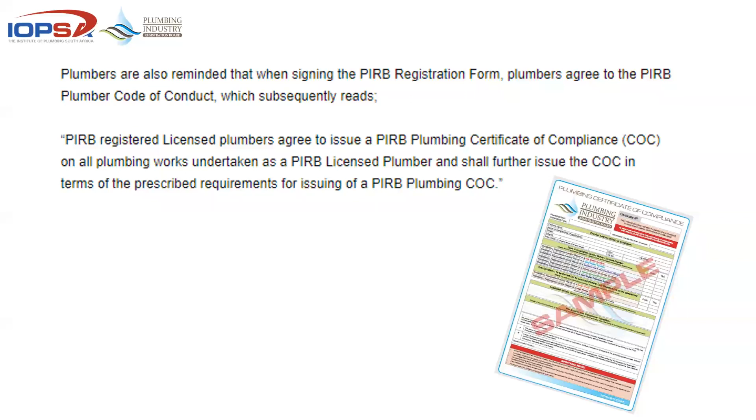Important to note, and this is where the discussion's heading, that COC is between the client, developer, builder, and the plumber. The local authority has their own rules, their own set of requirements that we'll look at now.

The issue at hand is that there's a caption down the bottom of that COC that gets signed by the plumber: the above plumbing works was carried out by me or under my supervision, and that it complies in all respects to plumbing regulations, laws, national compulsory standards, and local bylaws.

And herein lies the problem. The moment we step down from the national regulation, and it comes to the application of the building regulations and the actual inspections and work done within your municipal boundaries or in your metro boundaries, it becomes a local authority thing.

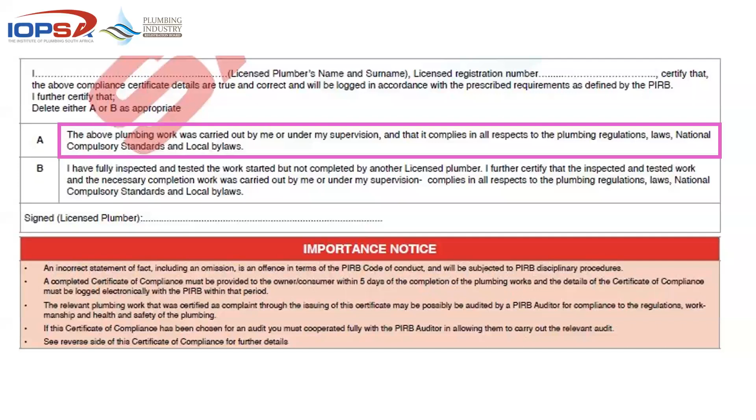So the argument around COC, no COC, license, no license, put that aside. Think about this like a responsible plumber would with regards to approaching his work. I'm just going to flick through a couple of screens so you guys can see. You might recognize your hometown or your metro.

Basically, all of these metros, as it stands here now, and we can keep going through them, they'll tell you that after the completion of a job, you need to have this thing: the test shall be in the presence of an authorized personnel, a certificate certifying the work.

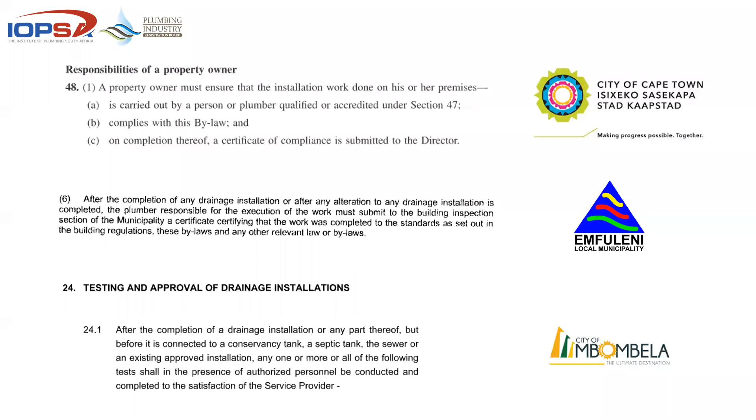So if you're on the drainage side, you could actually have them come and test it and set out as to the standards set out in the building regulation. So we can keep going at this. You can go from one local authority to another. Ekurhuleni goes a step further to say that you need to have it cleaned, you need to have all of those things there, and we'll get back to those two days shortly.

When any drainage installation is being or has been installed, or any alteration or extension of any existing installation is being or has been carried out, no person shall cover any part of that installation, alteration, or extension, or cause, permit, or suffer it to be covered until it has been inspected and approved by the council. Inspected means that the inspector's been there so he can cover it up. Inspected and approved means that he was happy with what was seen or with what was on site, and we have to, or we're allowed to then, cover it up.

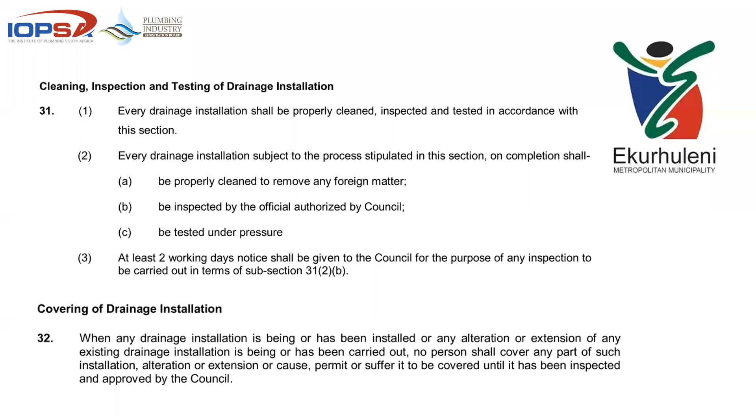You can go to Mossel Bay in the Southern Cape. You can go to Maritzburg, Msunduzi. You can go that way if you want to.

Sol Plaatje all the way up in Kimberley, Nelson Mandela Bay Metro, and then City of Tshwane.

I'd like for the guys in Pretoria and that area in Tshwane to look at your bylaws. It says where a drainage installation that's been constructed or drainage work carried out fails to comply in any respect with any of the provisions of the building regulations or these bylaws, in other words your Tshwane local bylaws, the owner must, notwithstanding the fact that he or she may have received approval for the plans for that installation, carry out upon receiving written notice the repairs, replacements, alterations, or maintenance work in respect of that installation. So even if the plan was approved by the local authority and there's minor issues on the plan, you'll find that they still expect you to go back and sort it out.

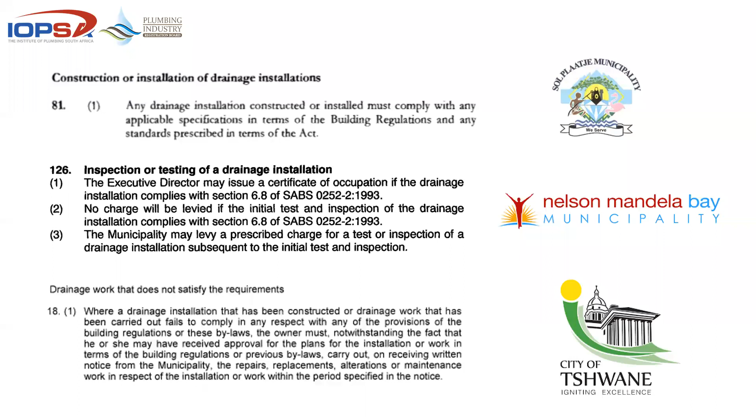Then I skipped one in Nelson Mandela Bay for a reason. You'll find that this one actually refers to section 6.8 of SANS 10252 of 1993. So whether it's the code of practice or the standard for drainage, or whether it's the building regulations that get referred to, let's have a look at 6.8. It says the drainage installation shall be inspected by the local authority - not another plumber, not PIRB, not IOPSA compliance auditor. It shall be inspected by the local authority as prescribed in regulation A22 of the building regulations. So you see that Ekurhuleni basically used this portion of the standard in their bylaw.

Drainage installation should be inspected by the owner or his representative as the installation work proceeds. On completion of the installation, before any work is concealed or covered, it should be ensured that - before we get to those four points, I'd like for you to have a look at this.

The standard says the installation should be inspected by the owner or his representative. And let's be realistic, guys, we're in business. There's no way an owner is going to pay you X amount of money to do a job and then take the responsibility of doing an inspection on the work you're doing if he's already paying you for it. So when it comes to 'or by his representative', if you are the appointed or selected contractor, albeit by contract, by tender, or by selection, then that means you are his representative.

All pipes and fixtures comply with the provisions of the standard and are free from defects. All pipes and fittings are clear of debris and superfluous matter. No jointing material projects into the pipe, and all joints maintain the continuity of the bore. And the pipework is placed, positioned, and secured. So normally I start with a big hammer, but in this case we looked at the standard. There you can see the references if you need to take them down.

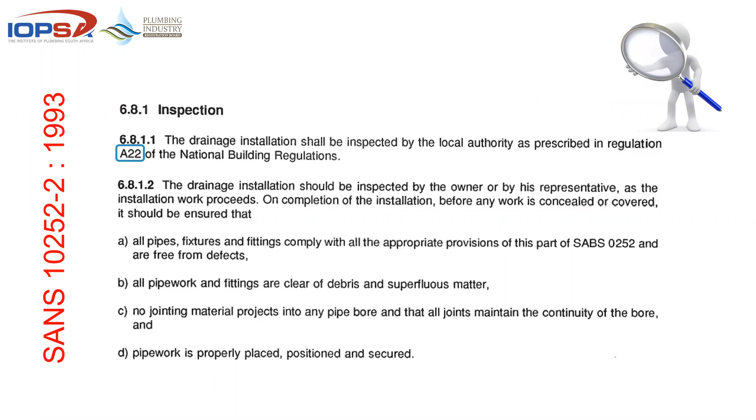A22 of the building regulations then continues to say the following: notice in the form required by the local authority shall be given by the owner to the local authority of a date which shall be at least 2 working days from the date of receipt by it of such notice, as the case may be. And we jump straight through to C because the foundation and the fire is not our problem at this stage. Any drainage installation will be ready for inspection and testing. So 2 days notice, give the guys from the council a heads up to say this is where it's happening, this is where we're busy, we've got a drainage installation for inspection and testing.

Then we skip to the next section that says no owner shall construct a foundation until the trenches, or enclose a drainage installation, until such installation has been inspected, tested, and approved by the local authority, provided this requirement shall not apply if that inspection has not been carried out at the end of the working day in sub-regulation 2. So you've given the guys 2 days notice, and he hasn't pitched up. It's a very thin line to be treading. The argument about opening back up or working this way or that way will always come back and be a discussion point, because on a different day you might phone the municipal inspector and expect him to pitch up, or beg him to pitch up on the same day because you need to fix it up. So this thing does cut both ways.

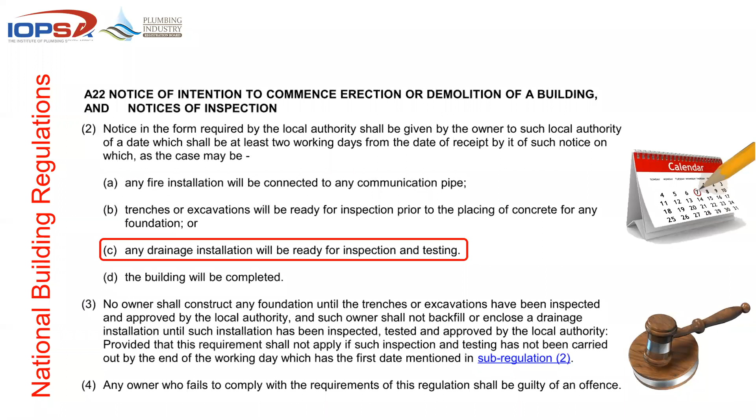The National Building Regulation continues to say in P7 that all these pipes need to be tested as per 426 and 427, as the case may be. It then says that no person shall put into use any drainage installation before such an installation has been inspected, tested, and passed by the local authority. So we've now touched on 4 or 5 different documents that all say exactly the same thing: inspected, tested, and passed by the local authority as complying with these regulations.

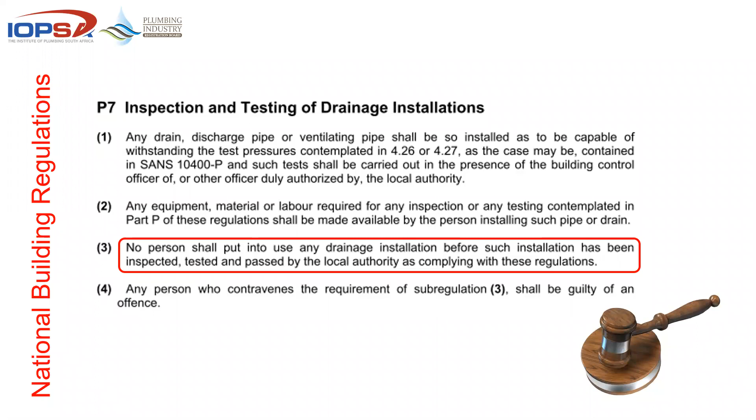And once again, being a regulation, any person who contravenes sub-regulation 3 shall be guilty of an offence. So having mentioned 426 and 427, it's pretty much straightforward.

In SANS 10-400 Part P, which is part of the application of building regulations, the building inspector or the BCO in your area should have a copy of this in his office, as should you in your business or for your business sake. 426 refers to tests for below ground drainage, gives you an idea of what is required. 427 is the test for discharge pipes and vent pipes above ground, and that specifies what needs to be done. So this is the short version from SANS 10-400 Part P - it basically tells you what you need to do to satisfy the regulation. In other words, if you are going to be testing, this is what we are going to be testing to.

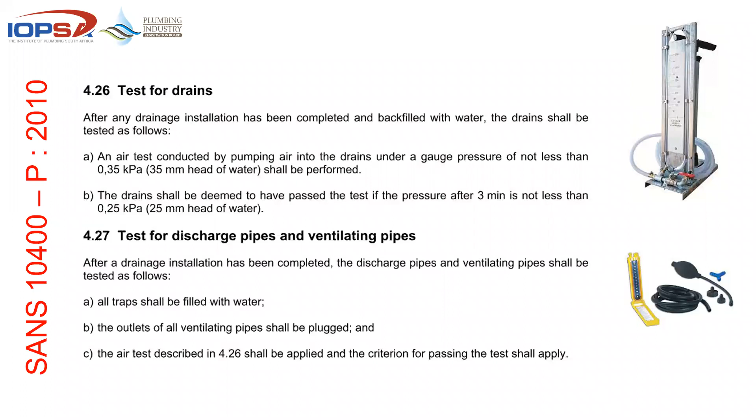If we take the same document and go into more detail in SANS 10252 Part 2, which is the installation of drainage, it puts down point for point from A to G exactly what needs to happen, how you do this. I'm not going to read through all of this - this is a far easier way to do it.

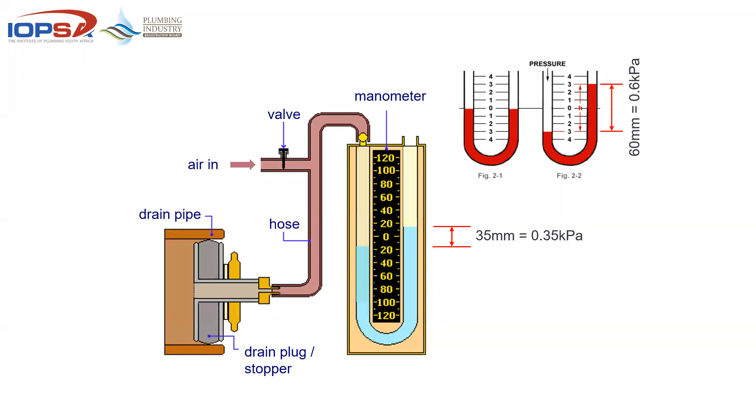You end up plugging the drain, you put air into the system until you get that 35 millimeters of head or 0.35 kPa pressure in the system, and you leave it. Close the inlet cock, and after 3 minutes, read the pressure of the installation. So it's pretty much straightforward - it's not even that complicated when it comes to testing the setup.

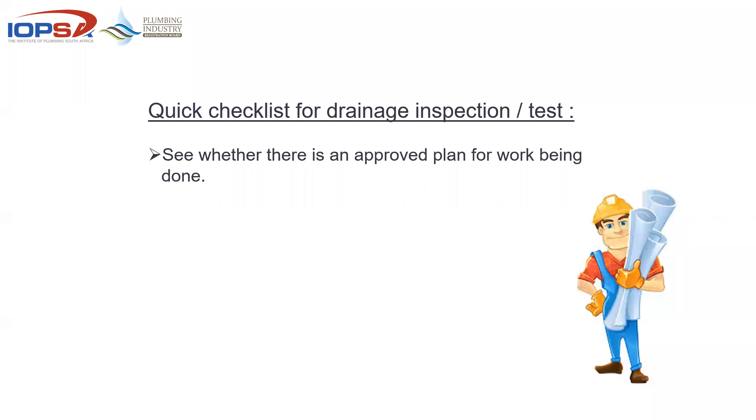If you are going to be calling for an inspection or a test, check whether there's an approved plan for the work, otherwise your chances of someone coming out there are very, very slim. Confirm that the work and the plan relate.

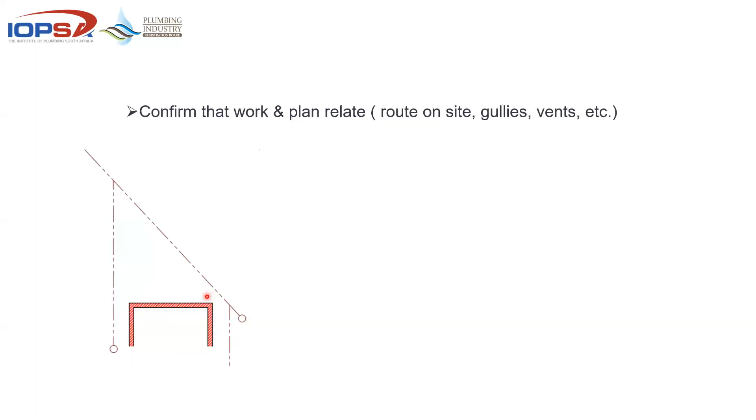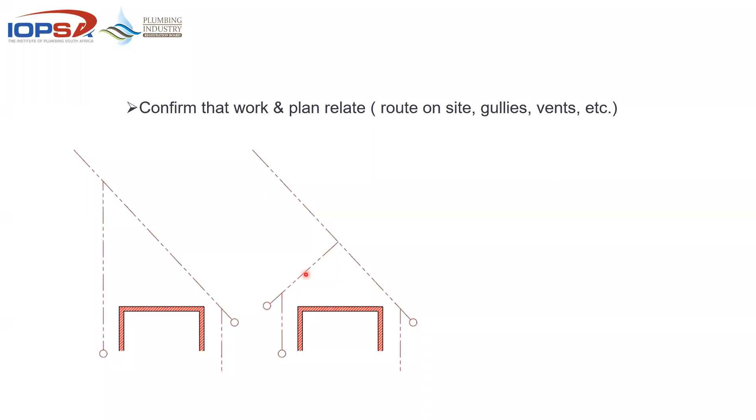Sounds pretty much straightforward, but here's a little example of how things can go wrong. That was approved originally, and then the contractor, for some reason, whether it was saving time or there was an obstacle, maybe a pallet of bricks or something in the way, decided to cut back into the system here. Then at future extension stage, that was not indicated or on that plan - there's a change of direction under the building. There's a reason why the plan was designed and approved like that.

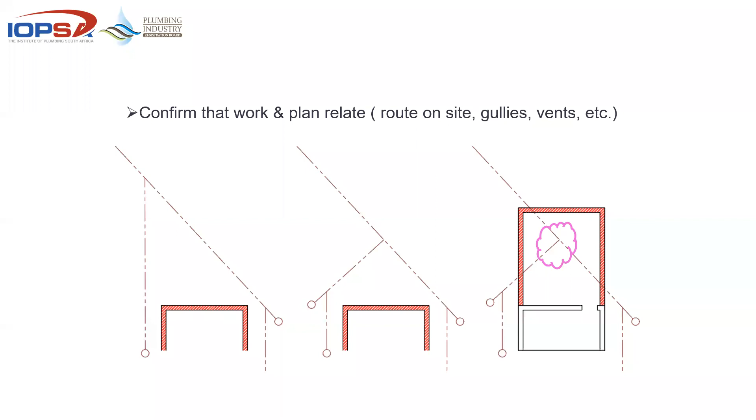So we confirm that it complies with the building plan that was put in place. We do visual inspections prior to testing. There's no sense in having an inspection done or even testing a line by filling it with air or applying pressure, smoke, whatever you want to use on that installation. We make sure that it complies, it's bedded properly, and backfilled to a point where you can get access into it.

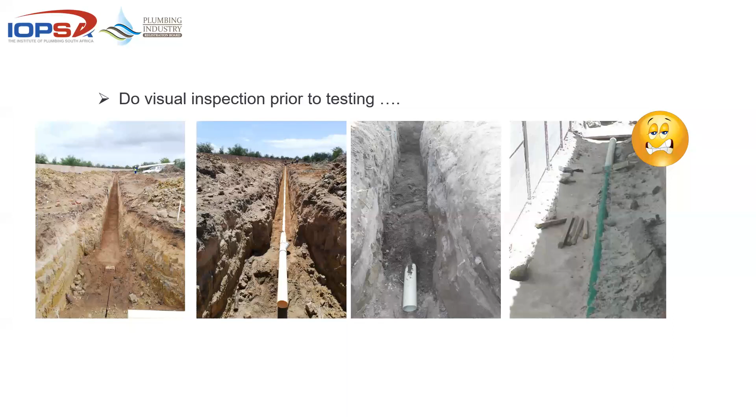Telkom ducting - I don't think that's going to go anywhere. So you do your own visual inspection prior to calling for the test. If you open an IE cover and there's water lying in the pipe, you know for a fact it's not going to mysteriously disappear when the inspector gets there. If there's water backlog, it's either filth, dirt, sand, or maybe a cement bag that you used for keeping the sand out. Something is keeping this water from flowing, so that is definitely not going to go anywhere.

We make sure that there are access points as per the building regs and 10-400 Part P. If you're calling for a drainage inspection and that's not there, it's not going to happen. Here you can see this pipe dropping down to the connection, with no access against the flow. So that inspector is more than likely going to get back in his vehicle and move on to the next site. Same thing applies - we need to make sure the access is there. We also need to make sure that the gradient is there. If the thing is flat or it's got a backfall on it, it's obviously not going to just be signed off - it needs to be done as per the requirements.

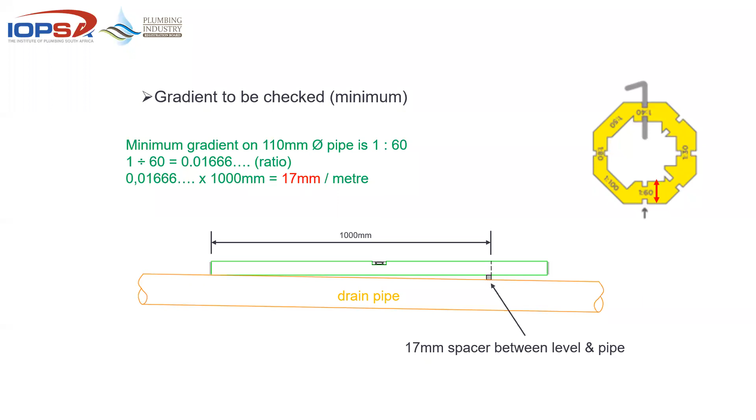Most municipal inspectors have their own equipment, but the standard requires you to be, and the bylaws say that you need to provide the equipment for such a test. Most of the pros have got their own equipment though.

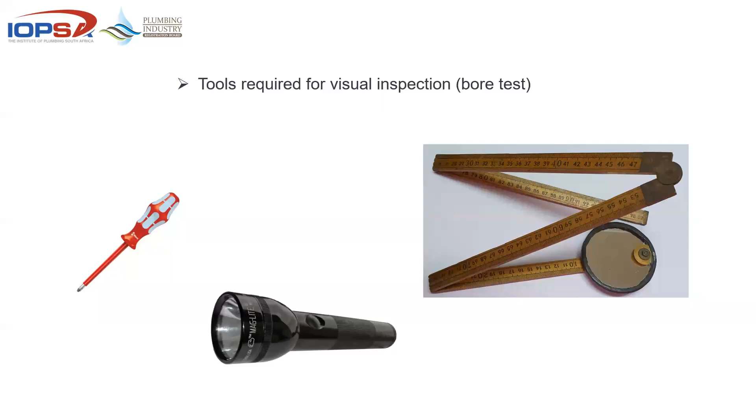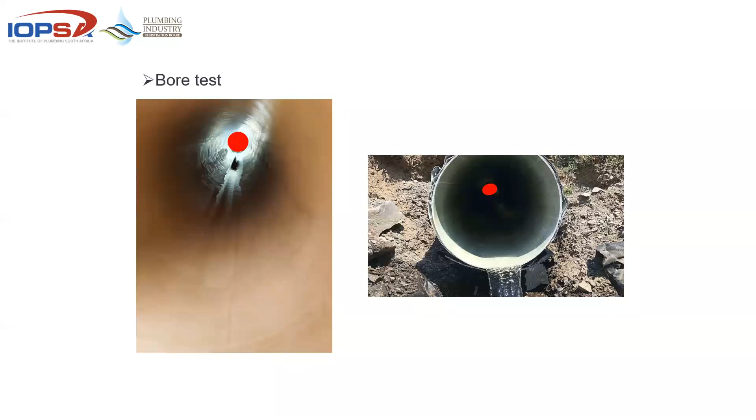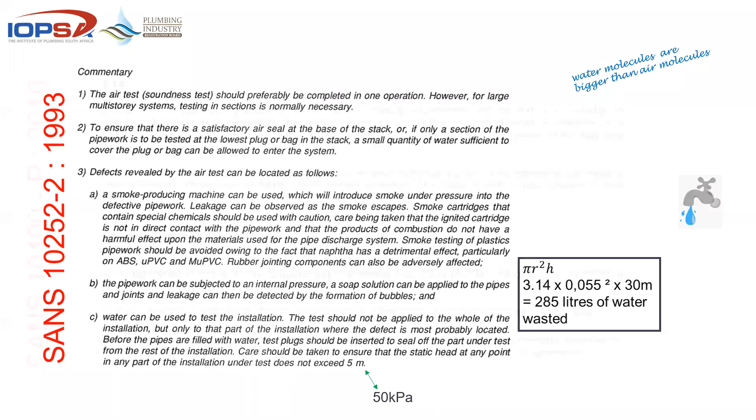Then almost there, the definition of a competent person. I'm not going to read that because we need to make sure that a competent person, this specific one from the same SANS 10400 Part A, is a generic definition to be used where no other definition is given or no references are made to other standards. Other parts of SANS 10400 contain definitions of a more specific nature relevant to their disciplines. So guess what, Part P for the plumber has got a very specific reference to a competent person in sanitation.

In other words, someone that could do design or work on a system is a person who is registered in terms of the Engineering Profession Act. In other words, he's got a PrEng number as either a professional engineer or a professional engineering technologist. He has a tertiary qualification, either a degree or diploma in civil or mechanical engineering. That's why you'll find sometimes they get referred to as wet services engineers, and is generally recognized or can furnish acceptable proof of having the necessary experience and training to undertake rational assessments or designs in the field of sanitation.

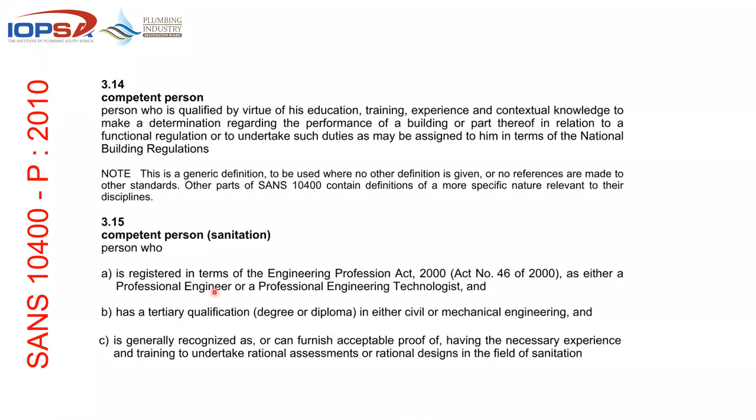So what we've been getting lately, and I'll finish off by explaining why I put this in here. Even a competent person needs to apply to the local authority to be accepted or approved for that specific design as being competent. So this person might be a professional engineer structural, but he is not going to get a civil design approved, because when he submits his paperwork, he's a different type of engineer and can't sign off a drain. The fact that he's registered as an engineer, he still needs to be in that field of work that he's aiming at.

The reason I dragged that in was that when you look at the building regulations, once we stopped with the COC and started working on the bylaws and all the different references, there's a portion that says the requirements of the building regulations shall be complied with by adhering to all the requirements of the prescriptive regulations, which is straightforward. Or you satisfy the functional regulation by adopting a building solution that complies with the requirements of the relevant part of SANS 10400. Or the last option, reliably demonstrating or predicting with certainty to the satisfaction of the local authority, remembering that this competent person still needs to demonstrate to the local authority that an adopted building solution has an equivalent or superior performance to a solution that already complies with 10400.

So if we do what plumbers do and adhere to the requirements of 10400 or the regulation, there's no need for this chap. But if there's anything untoward or not deemed to satisfy, then there would be a rational design. He'll fill in a Form 2 and provide his own PI cover to say that what he's doing is acceptable.

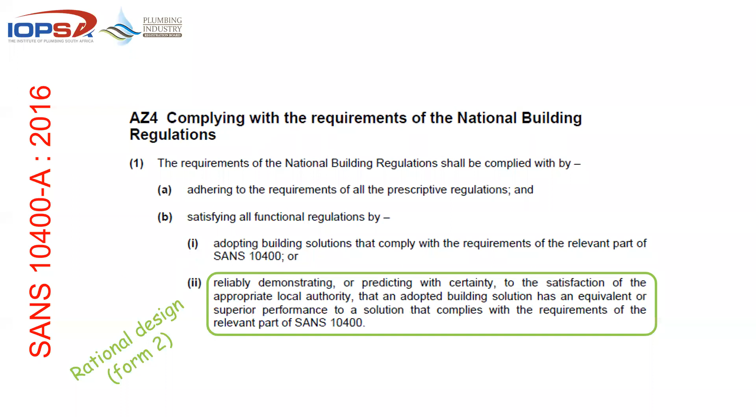So if you did drainage according to a rational design, with say a 1 in 80 fall on a 110 mil pipe, the council would have asked for a rational design. So when you do the drainage, anyone can do the above ground work, or what plumbers are entitled to do as per the deemed to satisfy requirements, but only that gentleman or lady that did the design on the system will be the one to inspect.

And it's not a matter of should or maybe he should go to site - he shall inspect and certify upon completion. So when it comes to the drain test, the pressure test, the ball test, all of those types of things, it will be done by that competent person.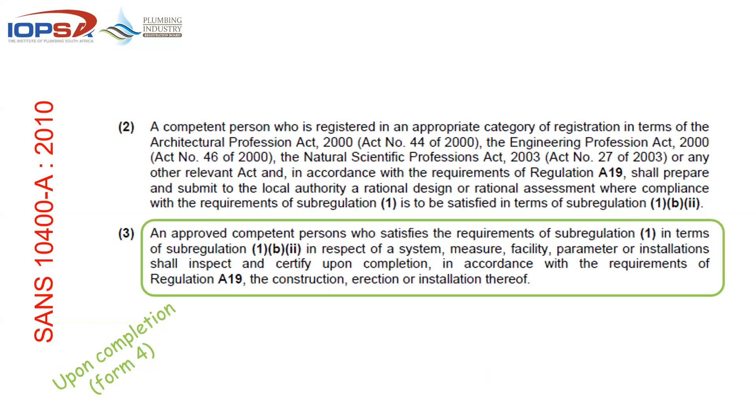Almost there, guys. I'm going to show you a couple of reasons why we need to have open trench inspections, or why we need to have work tested and checked before closing up a trench.

So open trench means someone checks the work before you cover it up.

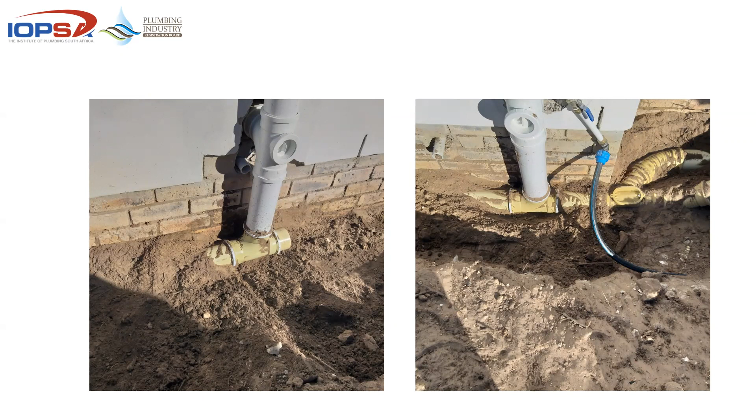The definition of an inspection eye is an access opening to the interior of any pipe or pipe fitting in a drainage installation, provided solely for the purpose of inspection and testing, and to which permanent access after completion of that installation need not be provided. So we get to site, there's nowhere to put the torch and the mirror, there's no access into this line, so we can't check this way and we can't check that way.

The requirement for an IE is that for inspection and testing, you need to provide an inspection eye. So yes, some of them cost R30 more, and sir, we don't have stock or whatever - but how do you suggest we get a torch and mirror into a branch unless we have an inspection eye?